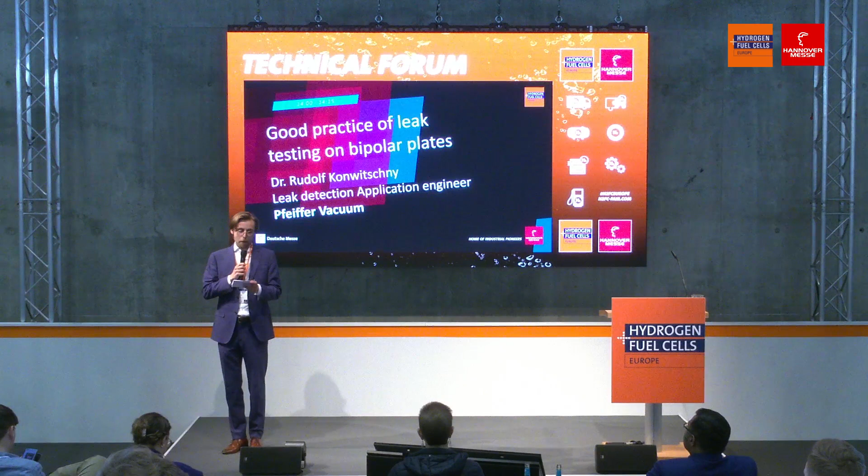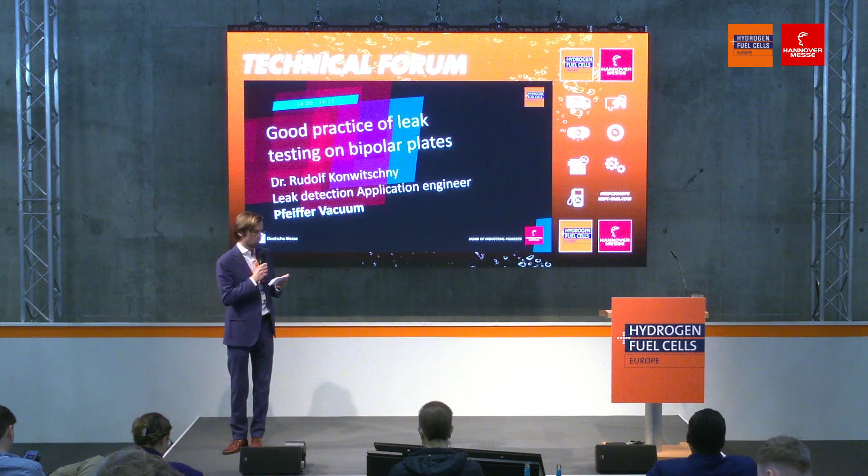Thank you very much for the kind introduction. Ladies and gentlemen, thank you for your time to attend this talk. I'm going to talk about the basics, or basically a fundamental approach on how to start with leak testing.

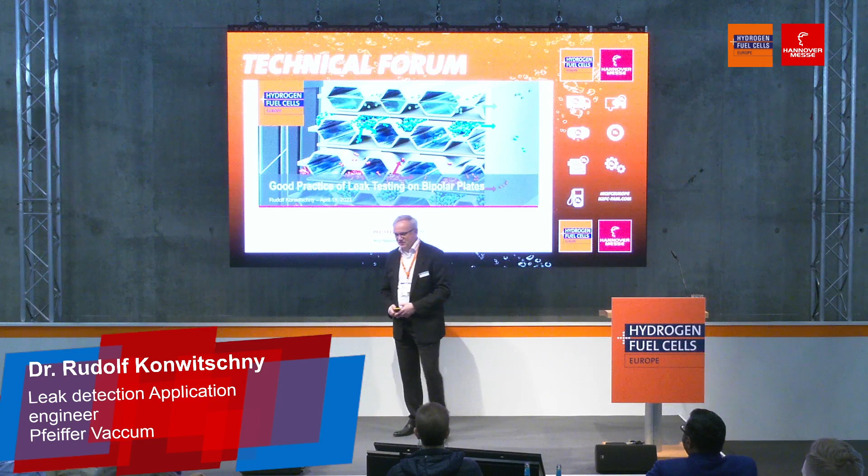So how do we start? The first approach is to ask the experts. When should a leak test be performed? In principle, leak testing is something which is unwanted. It just costs time, it costs money, and so on, and it does not add value to our product. So when should we do leak testing?

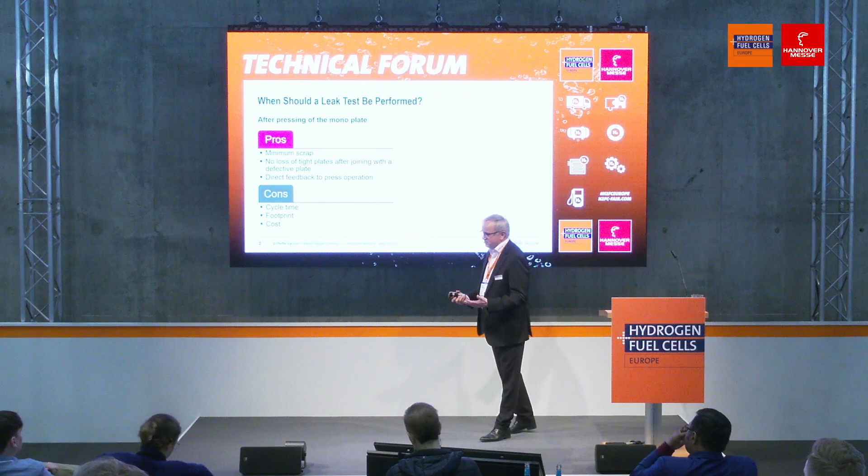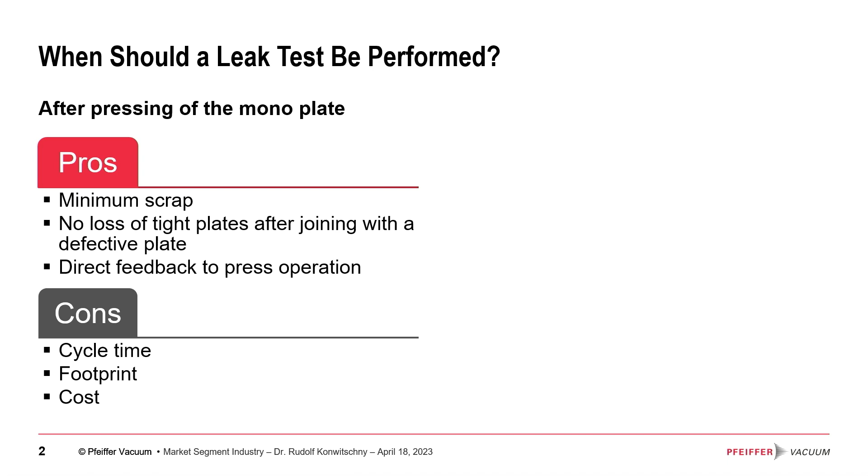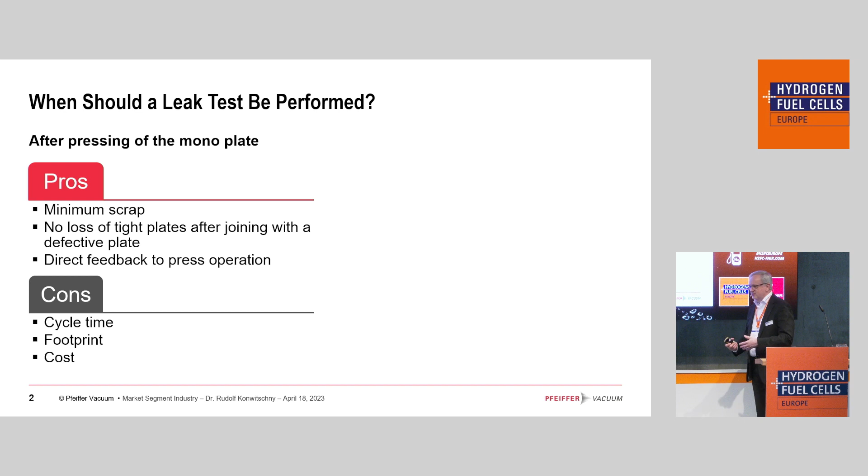One option is, for example, after production of the monoplate. Because if I'm joining two plates and I have one defective plate and one good plate, then I'm basically losing a good part, which is also something I do not want. The pros would be minimum scrap. It's also good to have direct feedback to press operation, so I'm losing a comparatively low amount of parts before I can take corrective actions, and I don't need to produce a lot of parts before I notice that something goes wrong. However, again, this is a step which is costing time, money, and footprint.

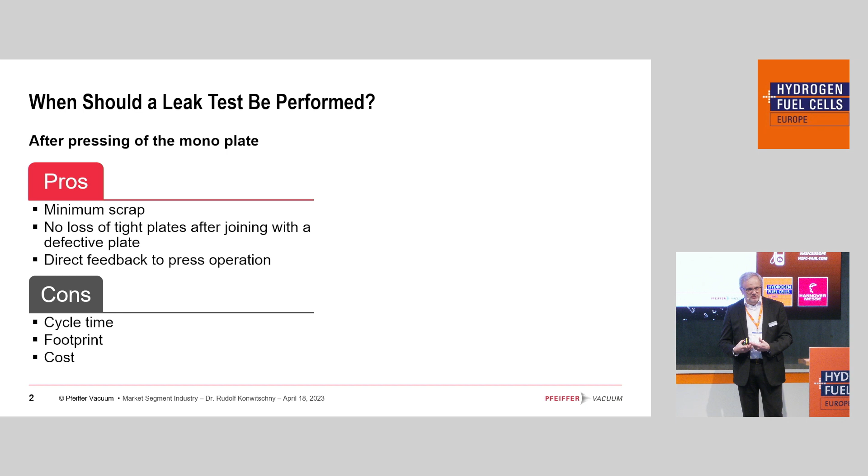Taking a balance on what the pros and cons are, in my daily life I experience a comparatively low interest in leak testing monoplates. This is completely different with leak testing of bipolar plates.

After joining the bipolar plates, integrity and functionality are key issues in order to produce good parts which are functionally tight, providing sufficient safety and functionality in long-term operation. Again, it costs cycle time, money, and footprint.

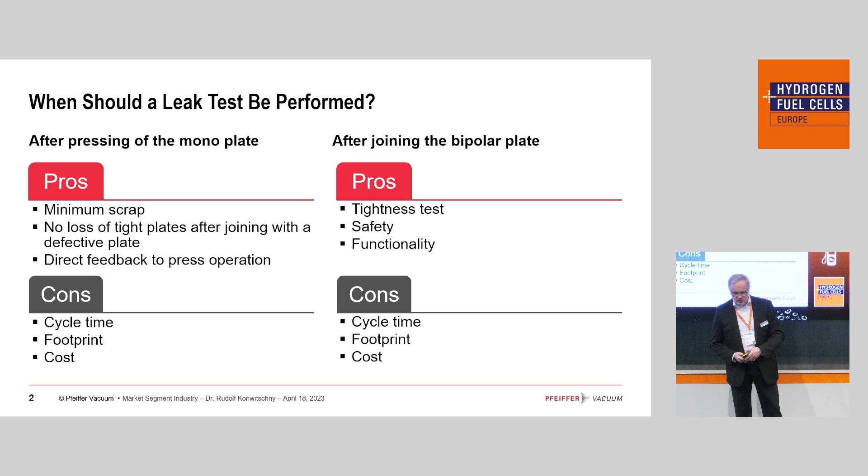Recently, I've come across an approach where a length of almost 50 meters was reserved for leak testing only. This is quite demanding. The question is whether we need to do this, whether we have to do it, or whether it can go cheaper and more effectively.

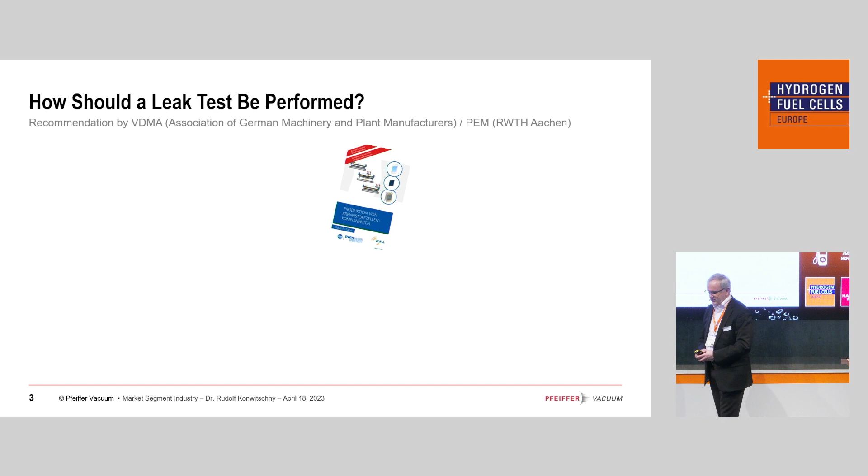So how should a leak test be performed? There is a brochure from the VDMA, the Association of German Machinery and Plant Manufacturers, in collaboration with one of the leading engineering institutes in Germany, the PEM Institute of the Rheinisch-Westfälische Technische Hochschule in Aachen. These two groups have joined together and published a brochure about production of fuel cell components, which includes a chapter about leak testing, though the schematics are somewhat general.

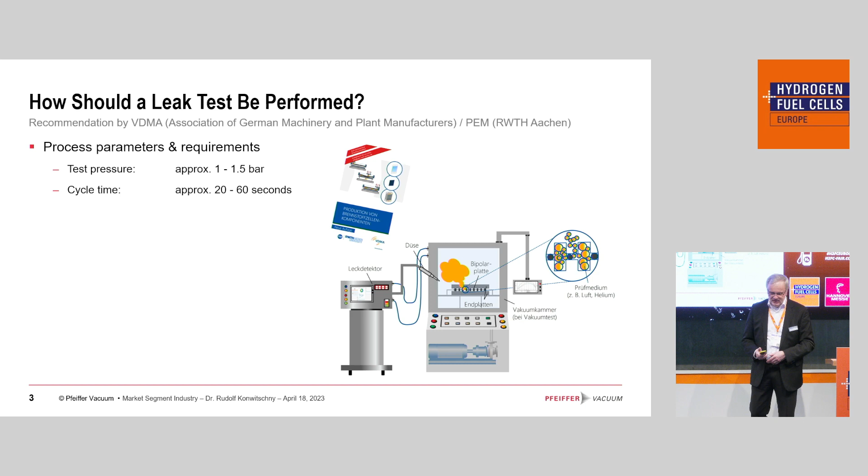What they tell us is that there is a quite narrow range of test pressures applied in real-life industry, and also the cycle time range is pretty high. We're talking about a factor of 3 between 20 and 60 seconds. Imagine we are targeting cycle times of 1 Hertz, so one bipolar plate per second. This means we need an awful lot of parallel stations, or multiple bipolar plates per station. So this is still something we need to work on.

Also, the test sensitivity, the pass-fail criterion in this publication, covers a broad dynamic range of 4 decades. Of course, we must not understand this as a recommendation. It's basically an image of what's out on the market. There is no common ground, no common understanding about the functional leak rate we need to test for in order to have long-term, reliable operation of a complete fuel cell stack, for example. So all these dynamics, all these parameters are out in the field.

There is leak testing with air out in the field, and leak testing with tracer gases with quite a broad dynamic range of requested sensitivities. The tracer gases proposed are also air, helium, nitrogen, and hydrogen in various dilutions, 100%, 5%. So there is a wild mix of test recipes out in the market.

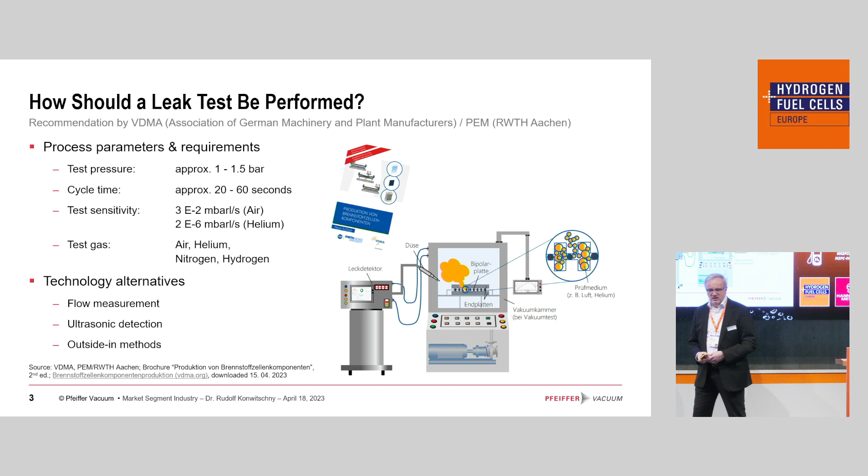The technology alternatives also mentioned in these publications are, for example, flow measurements. Okay, yes, this is a technology alternative. I do not agree with ultrasonic detection, because if we look at the detection limit of ultrasonic leak detection, we need a flow that generates sound.

And this is only the turbulent flow regime, so we are talking about a sensitivity limit which is higher than the requested one. We're talking about, let's say, 0.1 millibar liter per second or even higher. So I do not agree that ultrasonic leak detection is a possible technology alternative.

Outside-in methods are also mentioned, but as a golden rule of leak detection, you should always simulate the pressure gradient, the force which is applied in real life, also during a test process. So I also would rule out outside-in methods.

And what's more, if you're applying outside-in methods, you will have conductance limitations, the flow limitations through the flow field of a bipolar plate, for example. The flow resistance is much more drastic at low pressures compared to high pressures. So that's also one of the technology-related reasons why I would not go for an outside-in method.

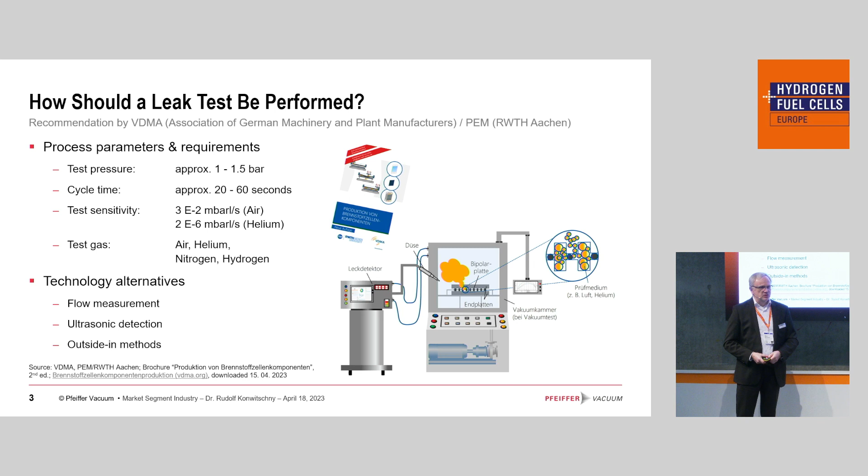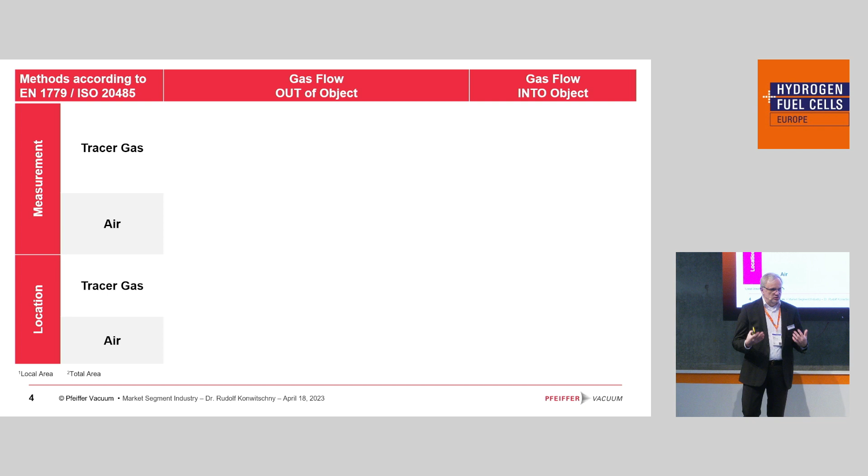If we go one step backward, there are existing regulations which are summarizing existing leak test methods, and they are summarized in regulations, for example, European Regulation 1779 and ISO 20485, so worldwide validity, and they are grouped according to various criteria. On the one hand, the first decision criterion is whether we have an outside-in test or an inside-out test. The second is whether we are going to test integral or localizing. And the third one is whether we are having the full scope of the part to be tested or only a part of it. And there is a broad range of potential methods.

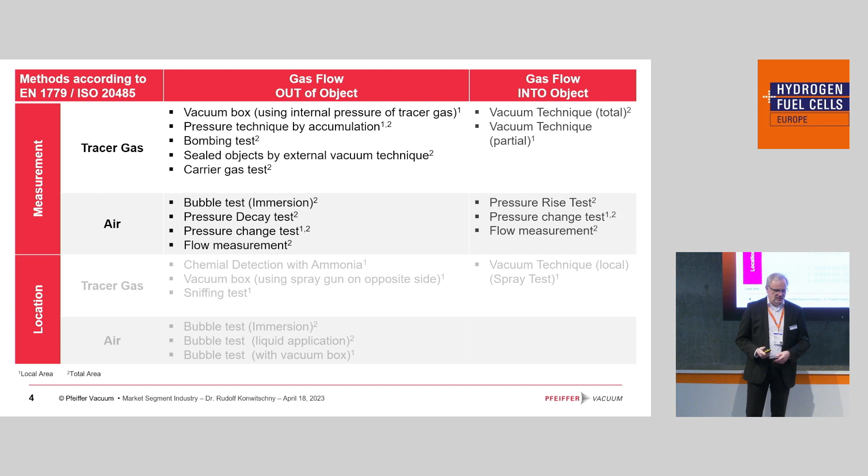We are not going to go through all of them because we can exclude outside-in methods and localizing methods from the beginning. We want to make a quantitative integral test. So we can exclude locating methods and also methods with a flow from outside in. And what is remaining are quantitative methods inside out.

But we can also exclude some of them. For example, the bombing test would be for hermetically encapsulated parts. So this is a special version, and some of the other ones are part of other groups. So we can stay with basically 4 fundamental methods that we can apply.

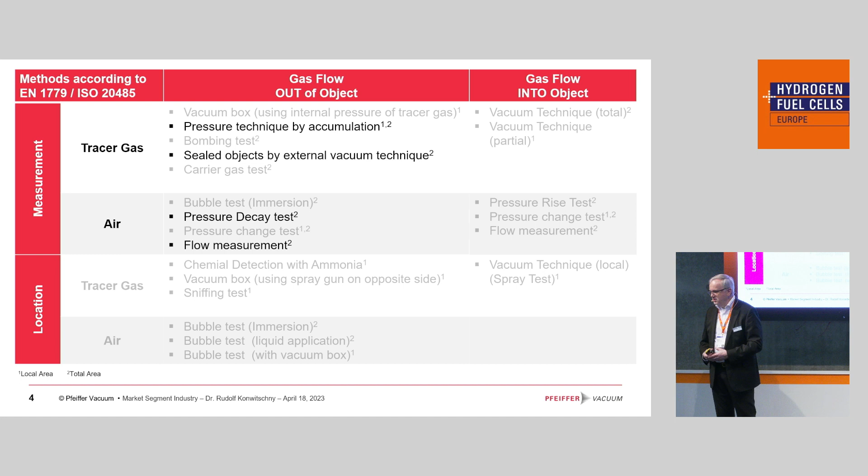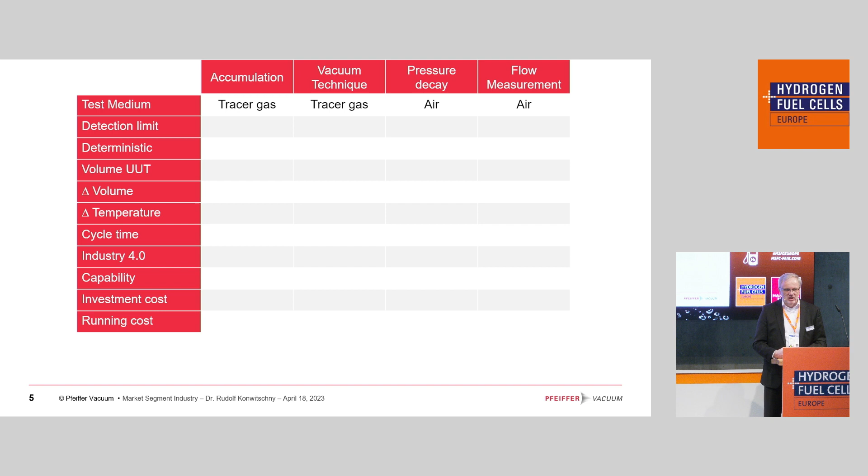Now looking at these tests in more detail, we can characterize them, for example, with respect to the medium that we are using. And of course, accumulation test. Accumulation is basically the collection of escaping tracer gas in an envelope in a test chamber around the unit to be tested, but at atmospheric pressure. So we are making a circulation inside this space, and we are detecting the concentration rise of a tracer gas inside this test chamber. And then we can calculate and track back and use this as a comparatively cheap quantitative method.

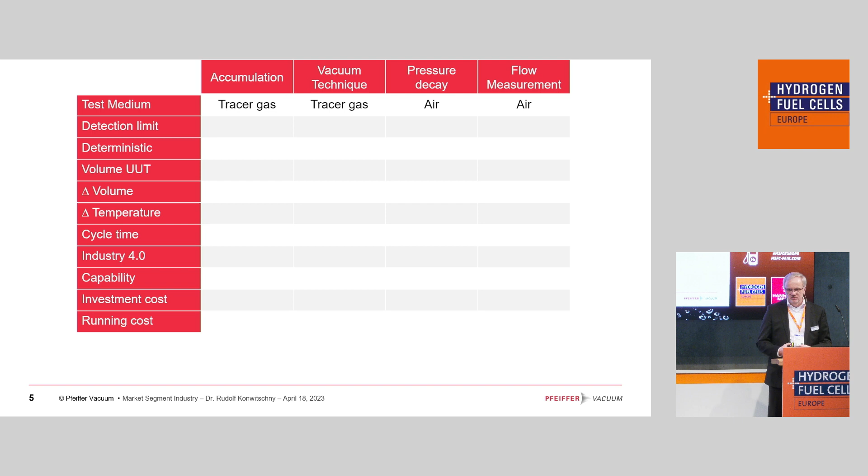The vacuum technique is basically also measuring inside out, but in a vacuum chamber. So this, by experience, normally is faster because the gas distribution inside the chamber is faster. And the sensitivity of the method is higher because we are reducing the background of the naturally ambient tracer gases, for example, helium or hydrogen, in air. So in vacuum, we have a reduced background, we have a faster tracer gas distribution inside the test chamber, so that's why this method is faster.

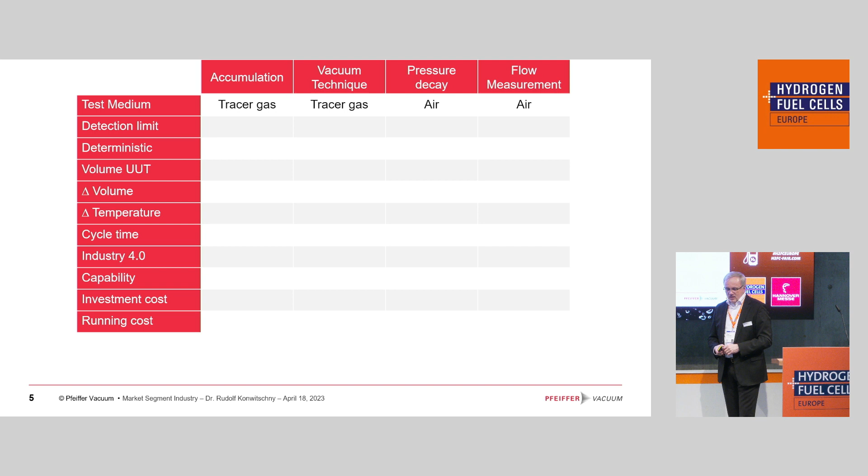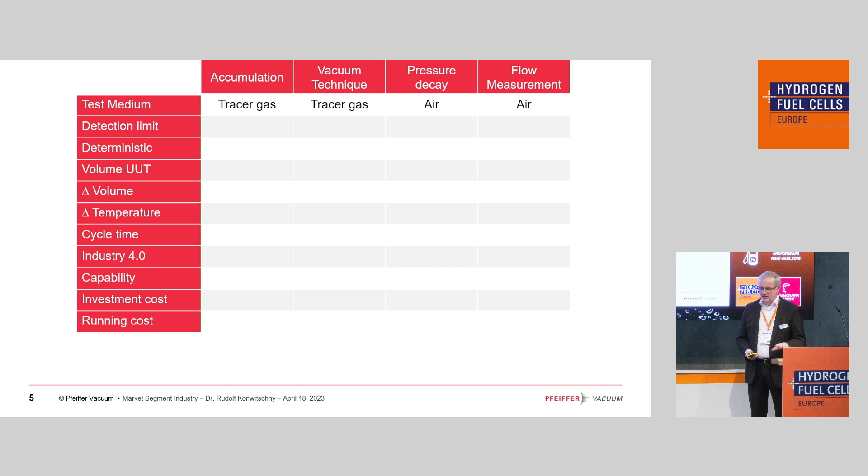Of course, tracer gases are more costly than air, and for that reason, for reasons of initial cost and also for tracer gas costs, running costs, often air is more favorable as a tracer gas.

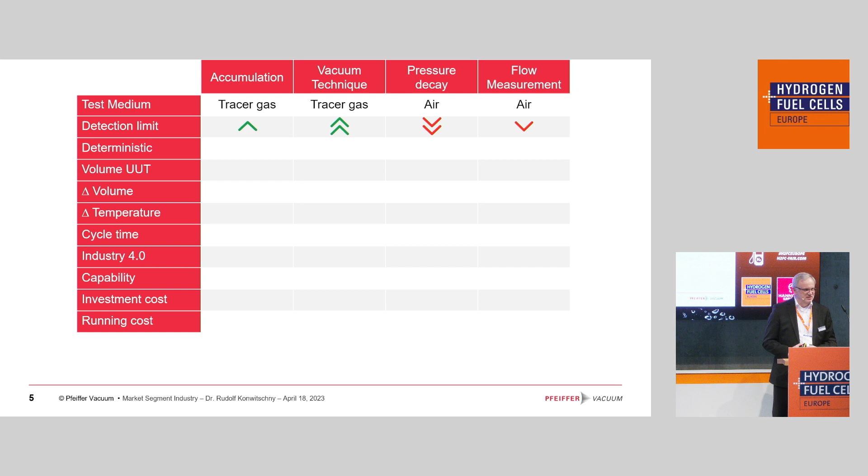Talking about the detection limit, well, this is a personal analysis from myself. So don't nail me to the cross, the people who are leak testing with air. I'm quite negative about the detection limit of pressure decay methods.

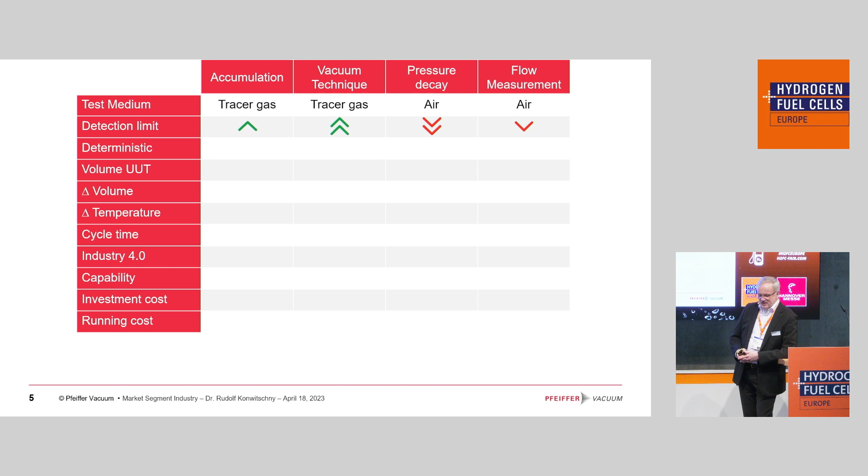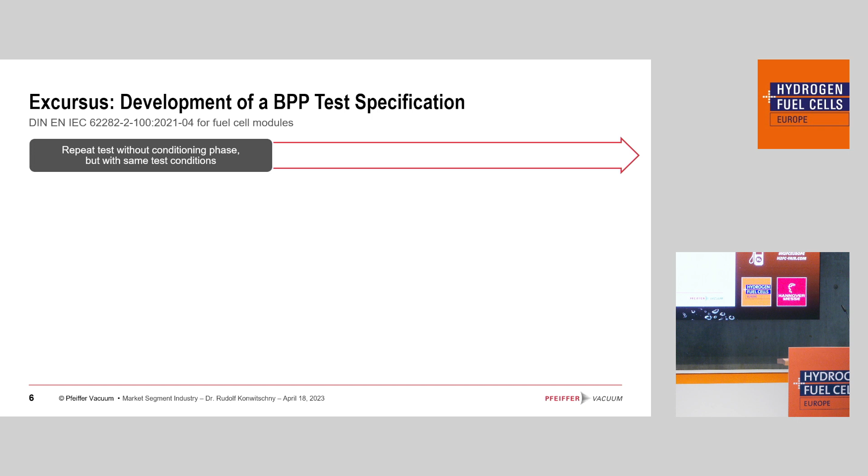For what reason? Let us take an example on how to develop a leak detection specification for a bipolar plate. One of the few data which is available in regulations is coming from this EN IEC 62282 and so on, which is for fuel cell modules.

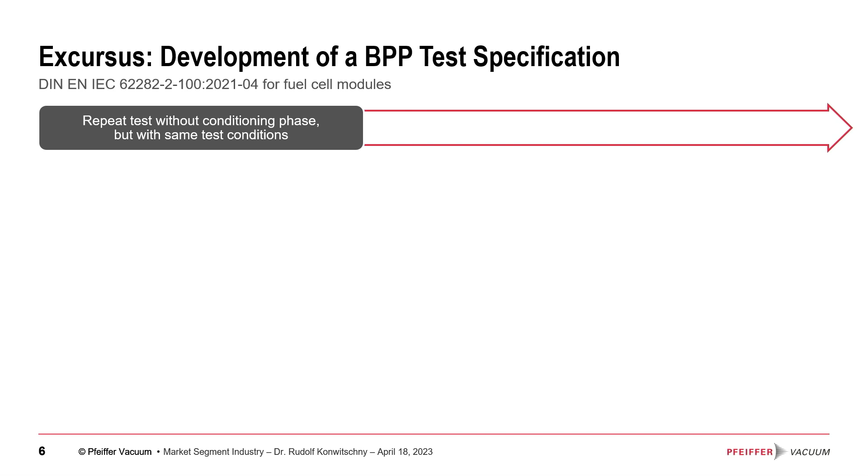And often people say, there is a certain value in this regulation and I go down from that. Looking at this specification, looking at this regulation, there is nothing about a pass-fail criterion in the paragraph about leak detection. Only in the paragraph about repeated leak detection, there is some indication that the leakage rate in a repetitive measurement must not deviate by 10% or a value of 5 cubic centimeter per minute, whatever the higher is.

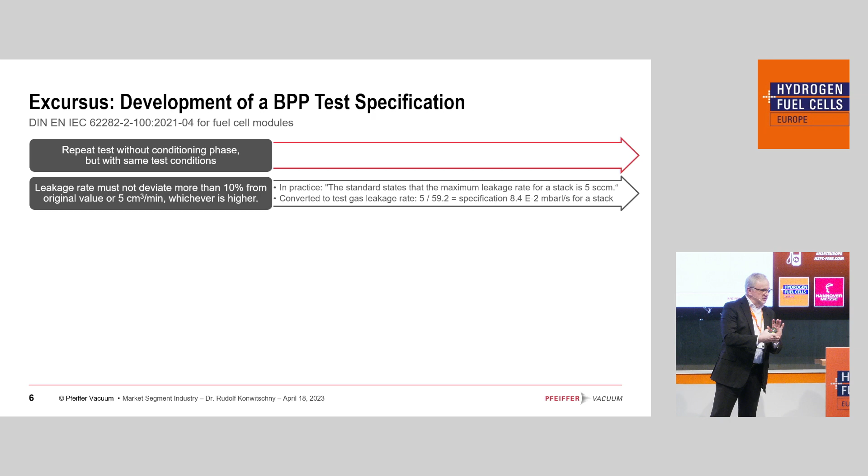So in practice, many people are saying, okay, we have this 5 SCCM. They're making the conversion from CCM to SCCM, from a value which is measured with a real test recipe to a value which is standardized.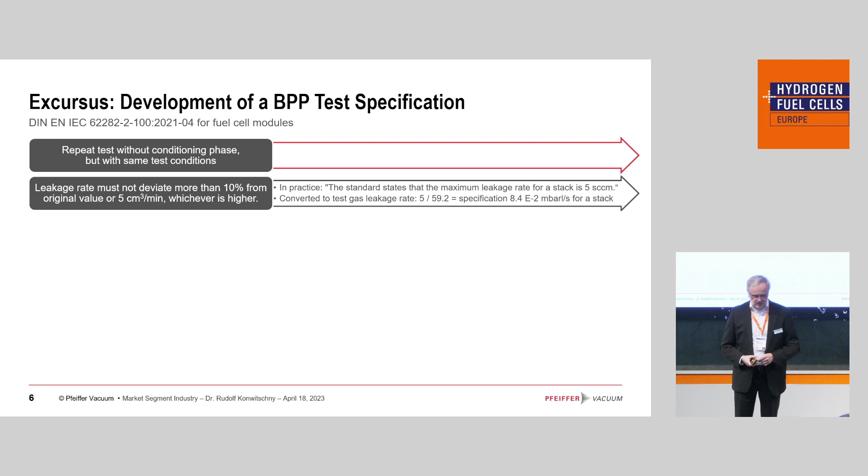This is a transition which is not taken into account much precisely out in the market. People are just saying, okay, we have a spec of 5 SCCM, we can convert this into millibar liter per second, the unit typically used in the tracer gas world, and we are down to about 8.4 times 10 to the minus 2 millibar liter per second for a stack.

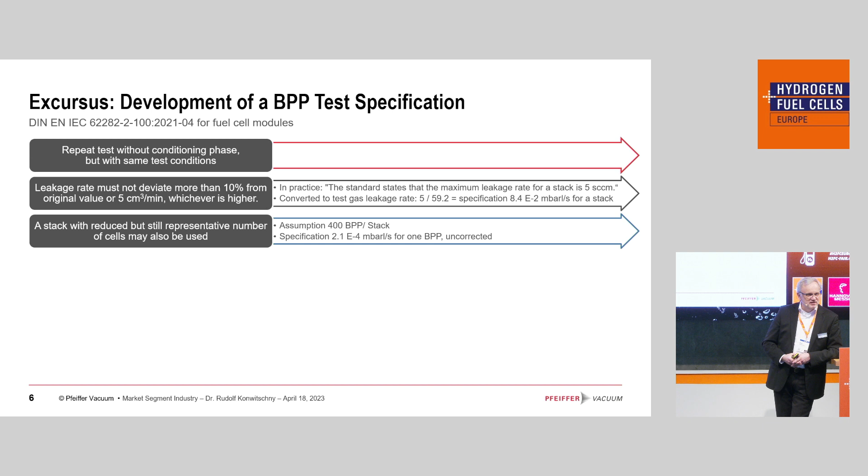In this regulation, there is also an interesting sentence which says a stack with a reduced but still representative number of cells may also be used. It is not mentioned what is the minimum number of bipolar plates regarded as representative. So if I want to break down to a specification of a single bipolar plate, I must assume that the amount of 400 is still representative.

Open question. So if I break this down with this amount, I end up with a specification in the lower 10 to the minus 4 millibar liter per second range.

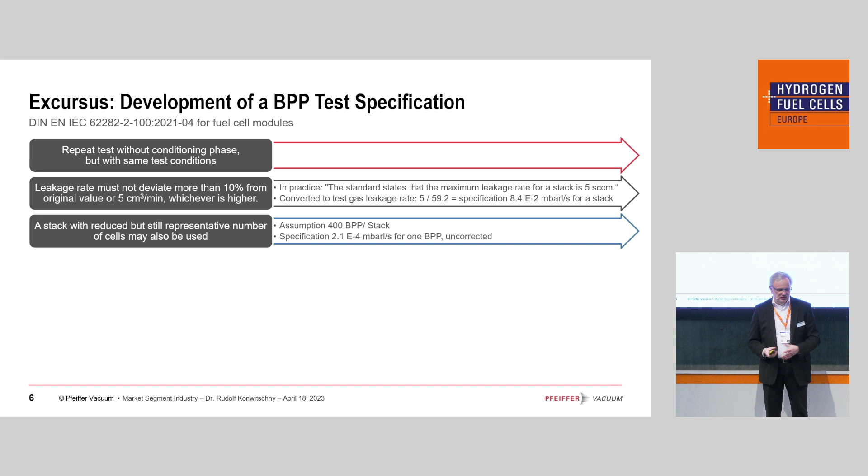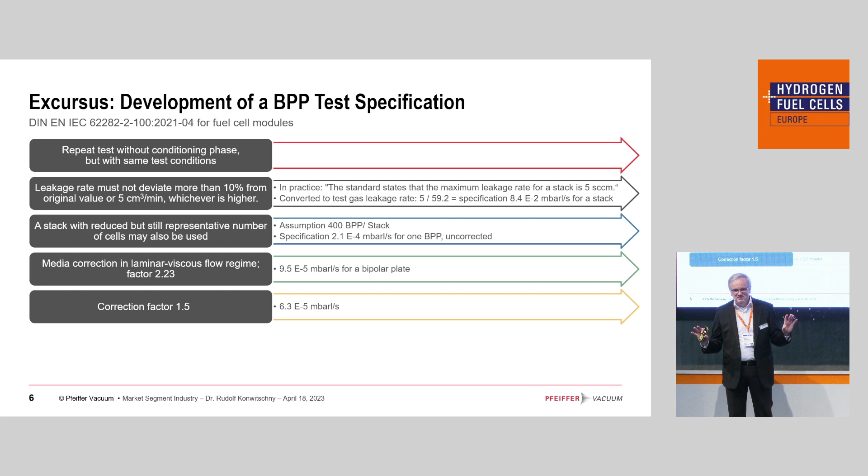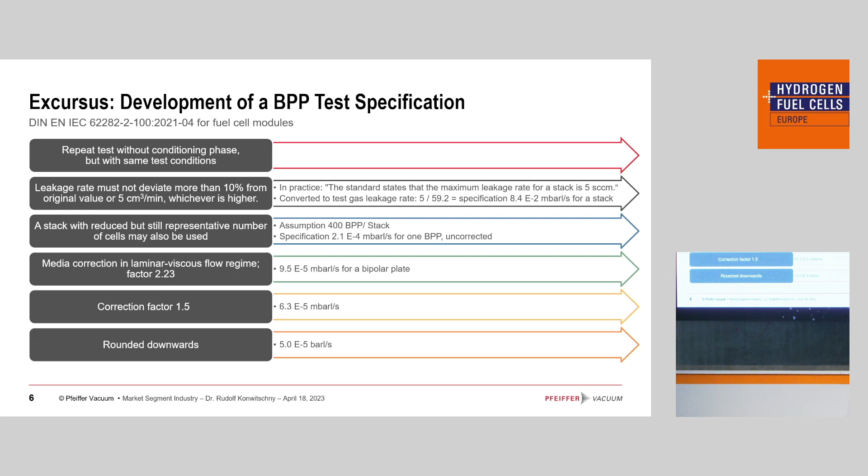The regulation says make a medium conversion from hydrogen to helium, and it also says take a safety factor. This is my personal pain, my personal fear, that I'm applying this, rounding down, and achieving a value in the 10 to the minus 5 millibar liter per second range, which is too strict to be handled with pressure decay or any leak testing method with air. This is the tracer gas world. And the question is: is this the full truth?

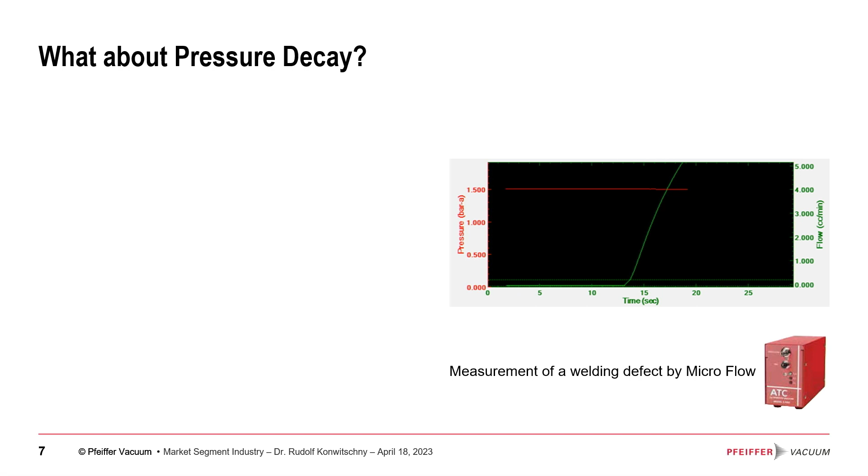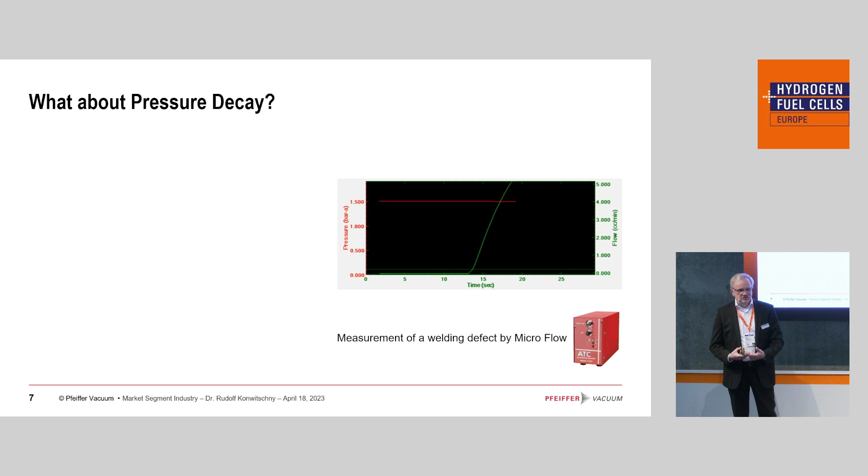Not necessarily. This is a real flow measurement of a welding defect. Just a little bit of sparking during a welding process can easily be detected with flow measurement, with air-based measurement. But this is a macroscopic defect that I can see, it's visible. So I'm achieving full range saturation of a 5 SCCM measurement device within a few seconds, so I can recognize the signal much faster. It's a fast method, yes, but not with the required detection limit.

The detection limit of 5 times 10 to the minus 5 would mean a pressure change of 10 Pascal in a measurement time over 60 seconds in a volume of 30 milliliters, which is typically the volume of a bipolar plate plus the pipework in pressure decay systems. But already a temperature change of 0.02 Kelvin will yield the same signal just due to the temperature change.

And the bad news is we want to do the leak testing right after a welding process, and we have to pressurize the part, so we are adding compression heat. So obviously, there is a lot of subject for environmental influences in leak testing with air at this sensitivity level.

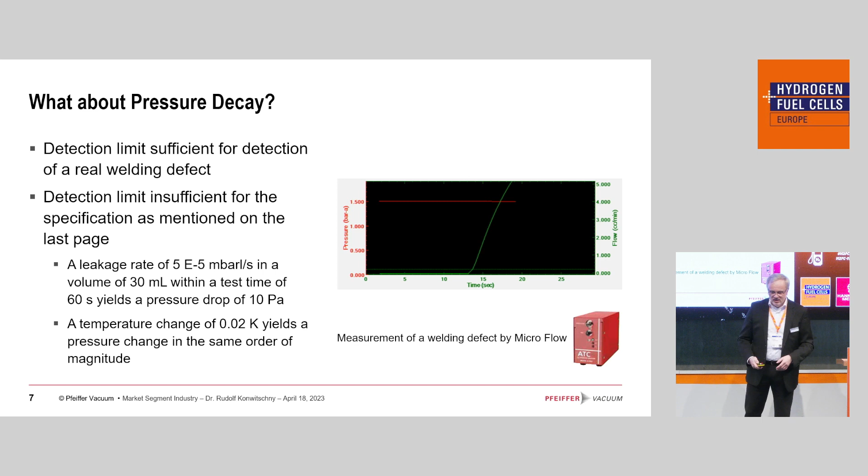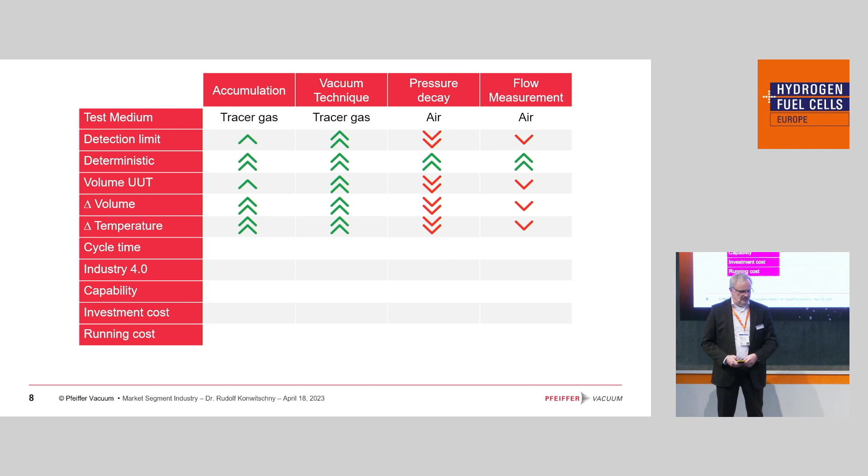And this is not the case in leak testing with tracer gases. Leak testing with tracer gases is more independent of the volume of the respective unit under test. I can measure very large devices as well, large bipolar plates, large devices. Tracer gases are insensitive to volume and temperature changes. They have a pretty good gauge capability, and the bad news is they have the higher investment cost and the higher running cost.

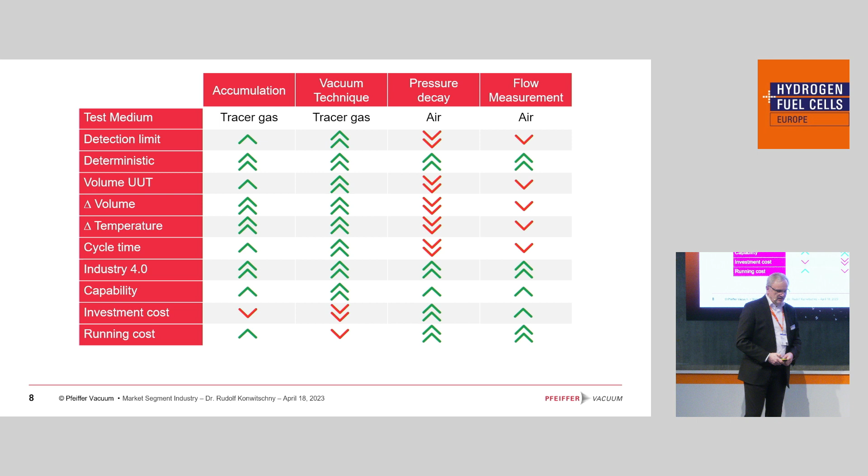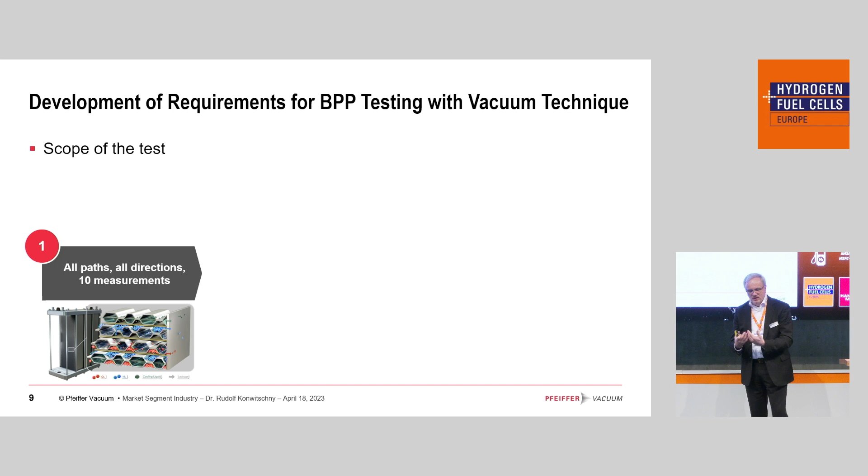So still, for me, the most suitable bipolar plate test method is the vacuum technique. For what reasons? When I started, in the early days of leak testing bipolar plates on an industrial scale, only 3 years ago, we had the requirement to do a lot of tests. All potential leak channels in both directions, so inside out, outside in, the various flow channels, and also individual channels from the interior to the outside, and also a common summarized gas loss to the outside.

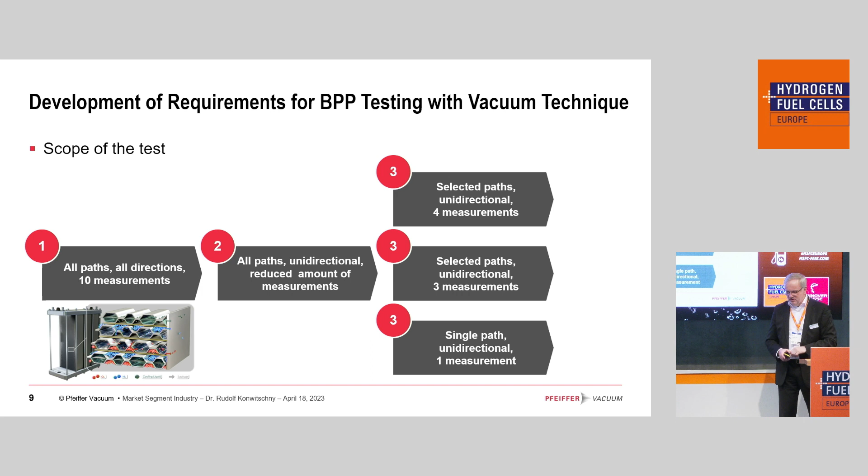This has developed to unidirectional paths, so we are skipping the testing in both ways. Right now, we are in a phase where we have a lot of real test recipes on the market. And what is landing on my desk, the majority is in the 10 to the minus 4 millibar liter per second range, so we are in the tracer gas world.

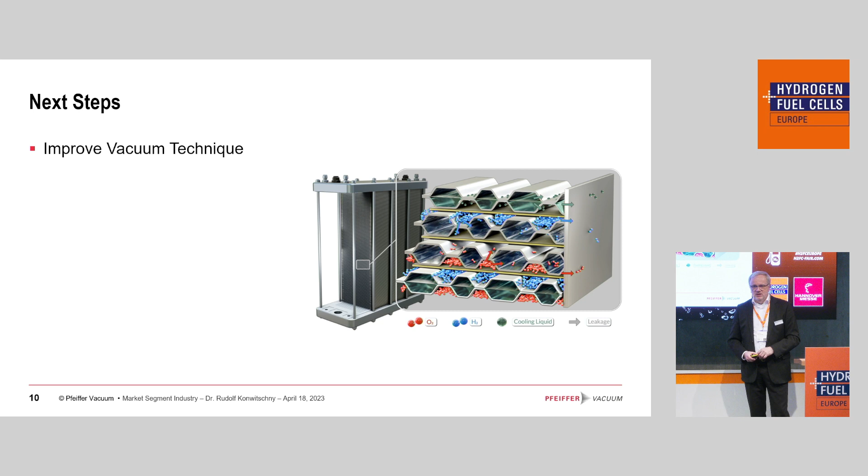So the next steps would be to improve this technique with respect to investment cost and running cost, possibly make parallel stations, go for cycle time, and this is the most important thing.

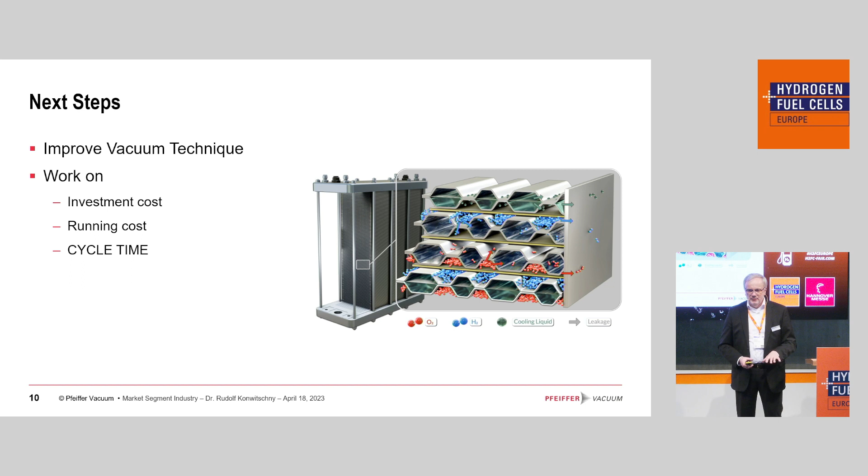This is the highest pressure that I'm experiencing in my daily life, and we are going the step now at Pfeiffer Vacuum away from just supplying instruments to supplying sub-assemblies, which can then be incorporated into production lines. So talk to the experts in leak detection, you do the machinery job.